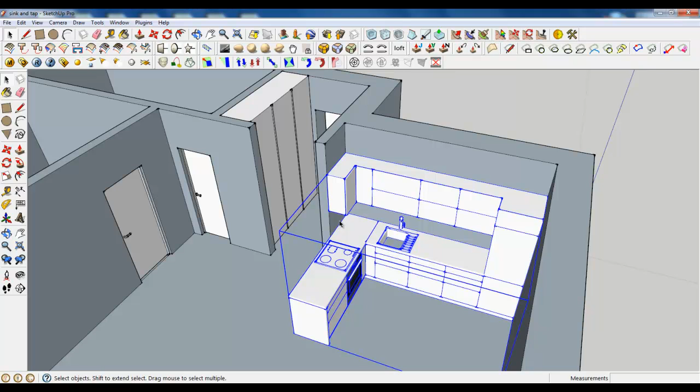We are back to the tutorial, and now I will show you how to create a chimney hood and shelf behind it. So let's begin.

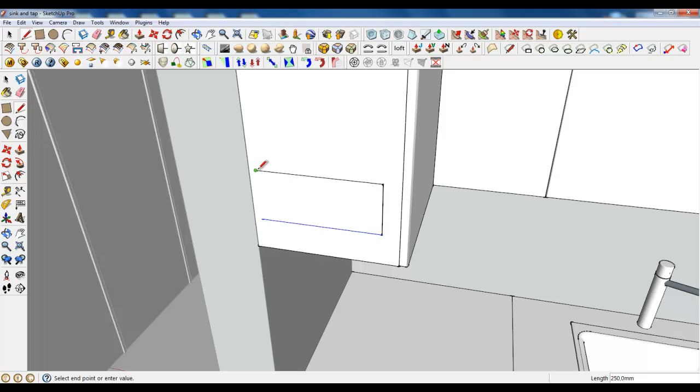Open our group and create a line, 250 length. Perfect. Close the rectangle. Make a group and extrude it by also 250.

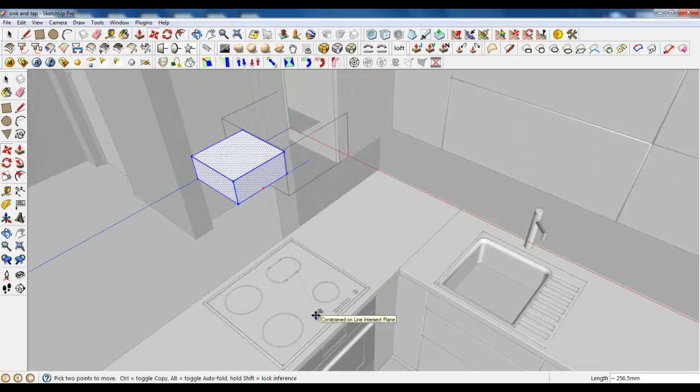Select everything, grab a midpoint, and using arrow keys, drag it to the middle of the cooker's top. Now move it there and lift it a little bit up by 50.

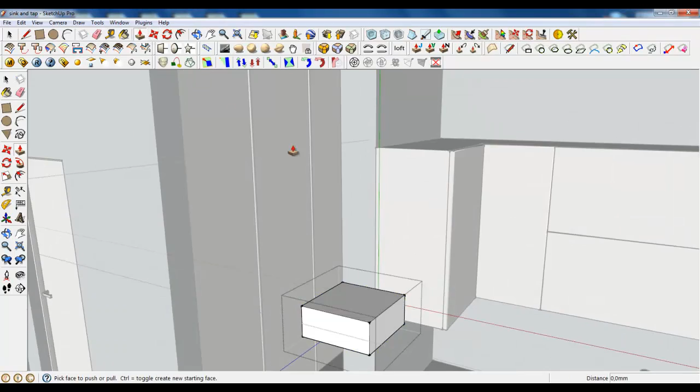Extrude to the corner. Make it smaller by 100 in my case. You might have some different distances.

Grab an edge and using rotate, copy it. Type in 35 degrees.

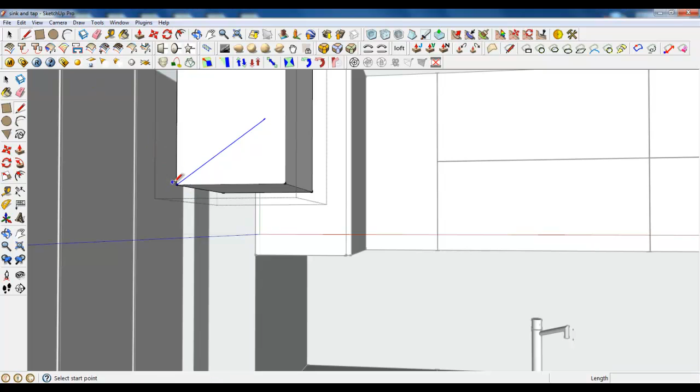Continue line and push it. Erase, make a group, open and offset it. You see it's too big now, so let's make it smaller.

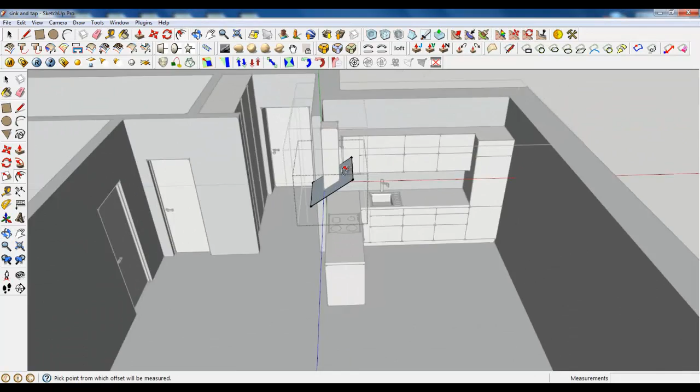Close the group and push Ctrl on your keyboard to make it smaller. It's good now.

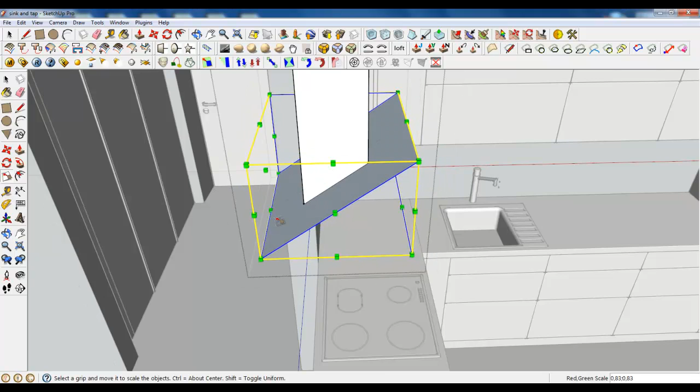This doesn't work, so open and draw some lines to separate and delete. It's smaller now, but also too big. Now it's okay. Good.

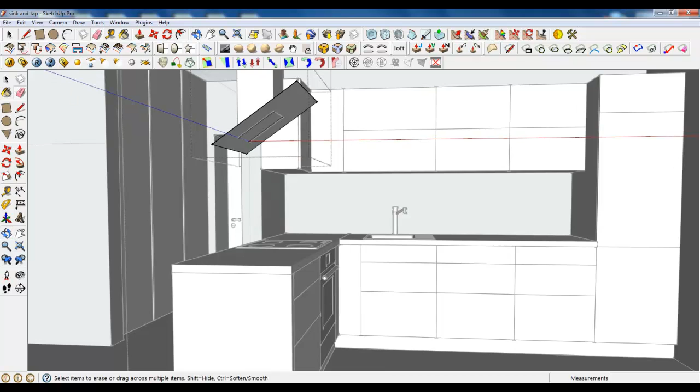Extrude 6 millimeters or 5 or 7, doesn't matter. Delete necessary lines and create another offset.

Type in 115, and make another one offset and type in 60.

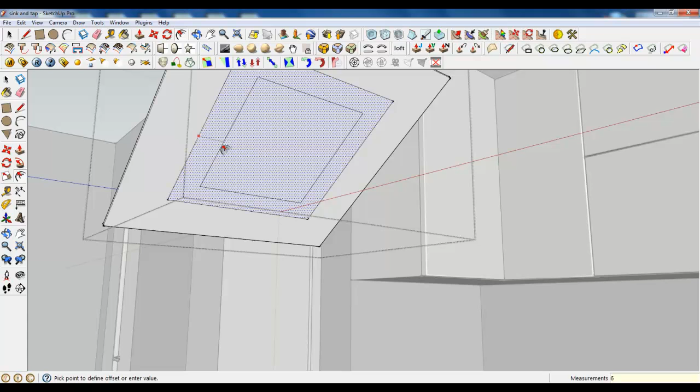Extrude and use your round corners in 3D, 2 millimeters and 4 segments. Good. Now select outer edges.

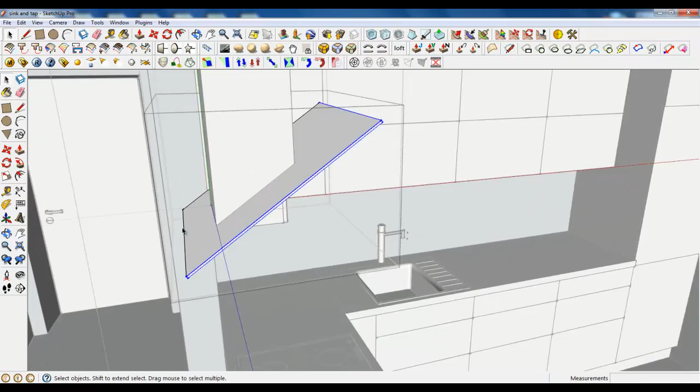This would be a glass, so we need a different corner rounding. I will show you what I mean. I mean that we need only 1 millimeter and 1 segment. This is like glass looks.

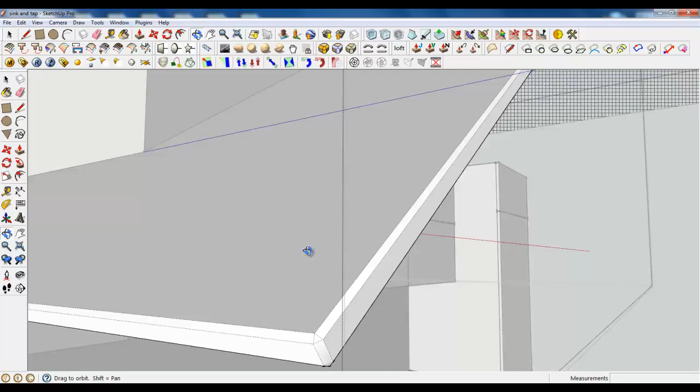Good. Now, sorry. Also select everything except group and lift it up 100 millimeters, for example. Remind this value and close the face.

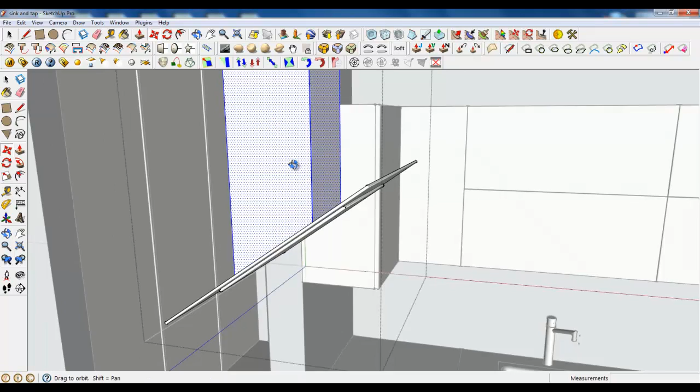Select it and down 100 millimeter. Now we can round corners in 3D. Type in 2 millimeters and 4 segments.

We are done. We have a chimney hood. Now let's create a

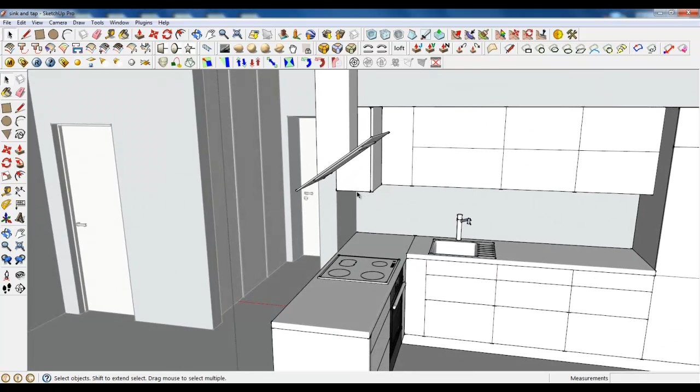shelf, and shelf is a simple rectangle with 2 cylinders. So let's create it. It's very simple.

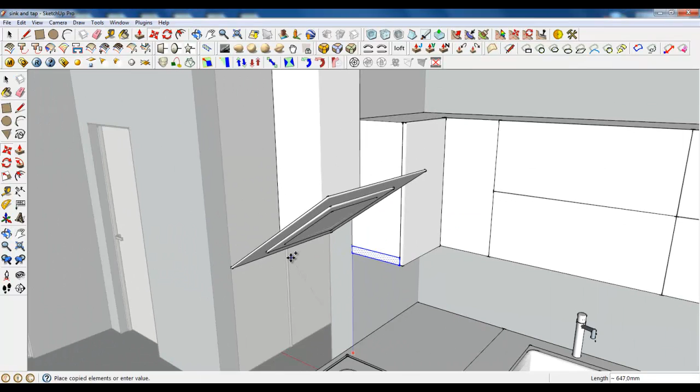Type in 40, and copy this group, this plane, not a group, down there. Now extrude by pushing Ctrl and lift it up. For example, in this place.

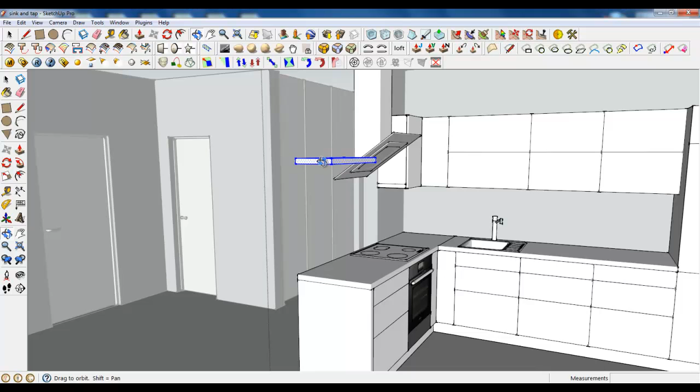If it looks not good, we can make it something like this. Yes, it's good now.

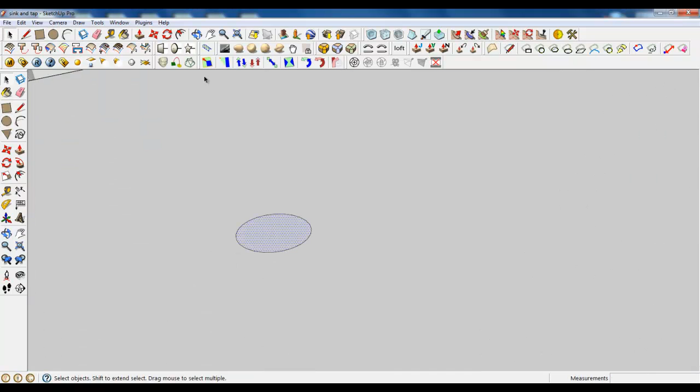Create a circle in, for example, 7mm radius. Make an offset of 1mm. Copy to the another side.

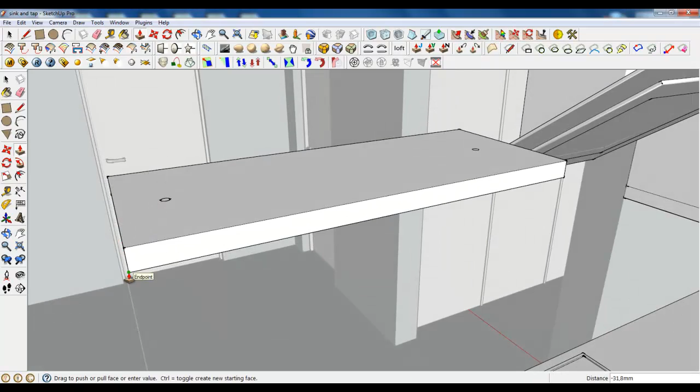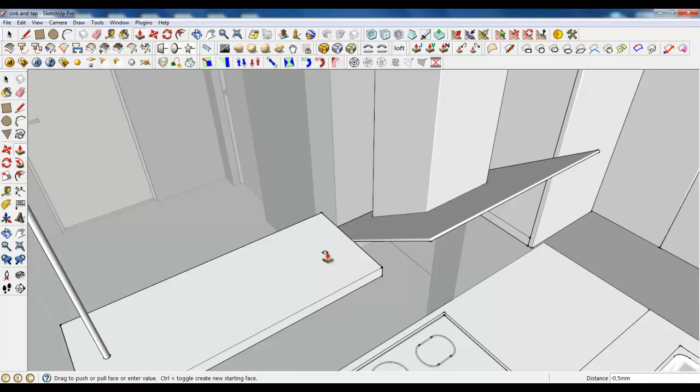Now push this plane to the endpoint and do the same thing with this circle. Now we have some separate cylinders, so let's push it to the endpoint, and endpoint is ceiling. It's good, and let's push it a little bit down.

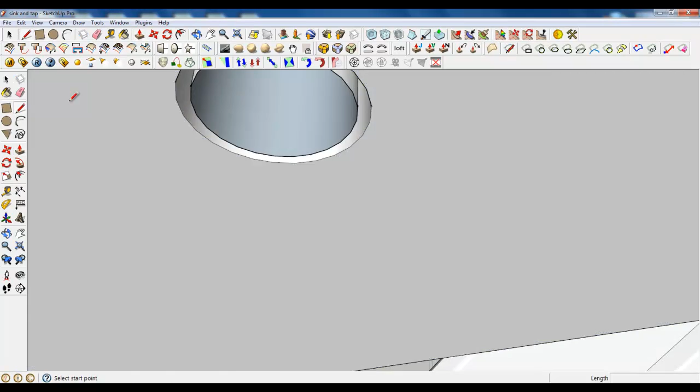Type in 30. It will be 3 centimeters. Also, we need to put some details on it, and

it's a time for round corners in 3D. Select only a rectangle and round corners, and let's type in 1mm and 3 segments. It will be a key for this board.

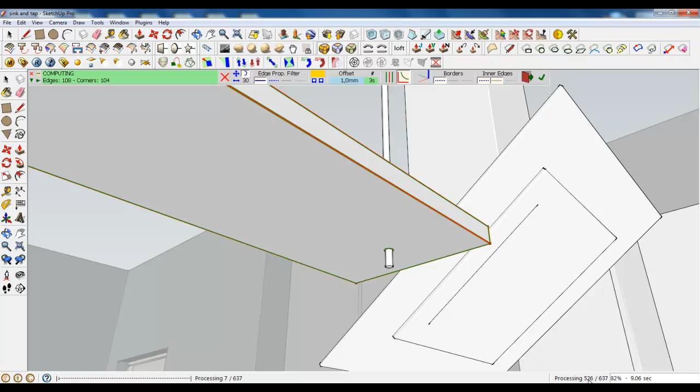It's proceeding quite fast and good now. Also make some roundings on the circles, not to be so sharp.

So this was a tutorial on how to create a chimney hood and a shelf. See you on the next lesson.